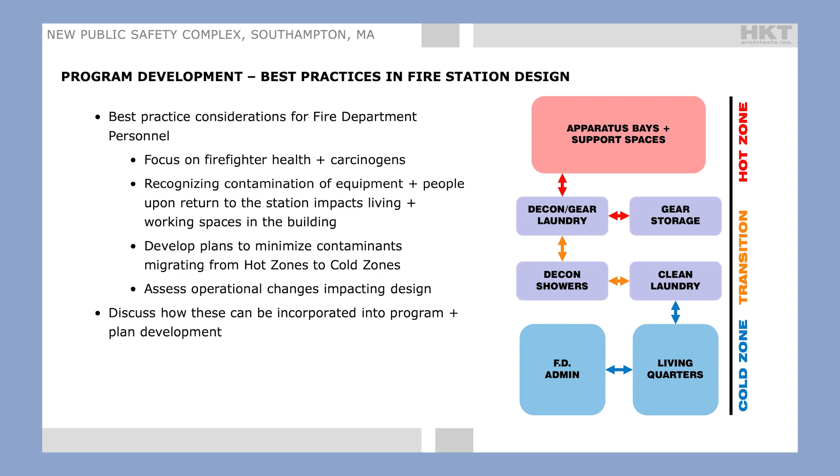And it's a process to figure out what your operations are and how that flow will work for your unique building. That's something we work with every department on trying to figure out, and I think it's something we've worked really hard to make work in this building as well.

One thing to note: the way every designer approaches programming is a little bit different. There are net square footages and there are gross square footages. Net square footage is the dimension of the space between the walls. So when you look at this room, for example, the distance from the face of that wall to the face of that wall, and from the face of that wall to the face of this wall, if we added that up and multiplied it out, that would be the net square footage. When you look at gross square footage, you're taking the depth of that wall, any circulation spaces, hallways, plumbing chases, and adding all of that in.

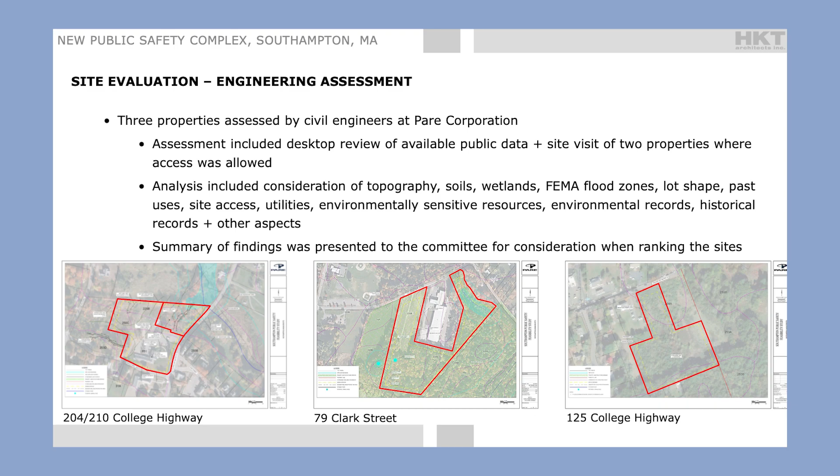We took that engineering analysis and presented it to the committee, and then used that information to rank the sites as part of this site matrix. The site matrix looked at 6 different categories: location, accessibility, site features, environmental, site development, and availability. Each of those categories had subcategories, and maximum points were assigned to each. We had a lengthy discussion with the committee where we went through each of those sites, each of those bullet points, and based on the engineering analysis and information we had, we assigned point values to that category for that particular site.

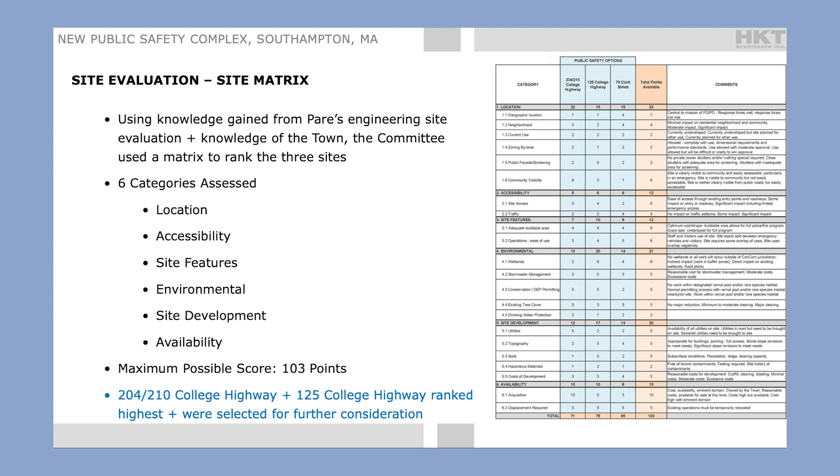At the end of it, we summed all of it, and the sites that ranked the highest, the 2 sites that ranked highest - 204-210 College Highway and 125 College Highway - were selected to continue on in the process and for further consideration as the final site for the public safety building.

At that point, we took those 2 sites and did some test fits. What that involves is basically taking the building program and blocking it off into large-scale components - for example, police operations or fire department living quarters, just big blocks of space - and start to organize them on the site how they might be organized in a building, put parking in, put other site features we know would be necessary, and see whether or not these sites were going to work.

When we started it, we had the engineers do another little quick analysis of the sites. You can see that here. So 204-210 College Highway is about an 8-acre parcel, and it's owned by the Town of Southampton.

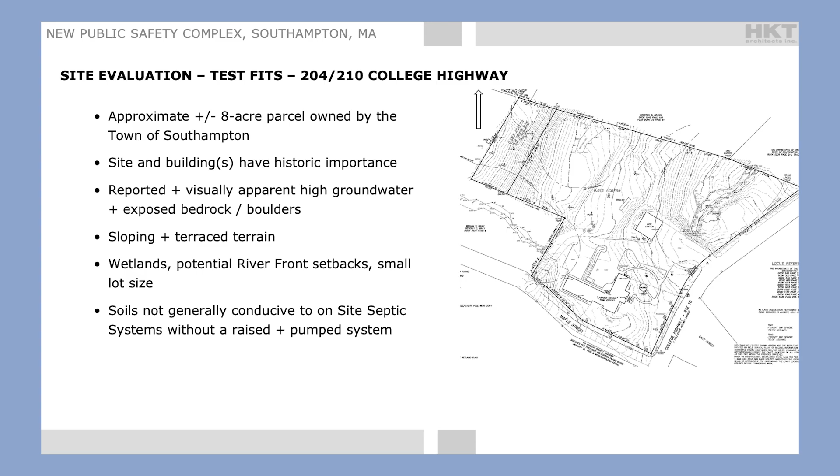It did have a lot of challenges, though, that we saw right off the bat. There's the issue of a historic structure, the existing fire station, and how that would be viewed through historic committees and the Mass Historic Organization. There was reported high groundwater issues, and exposed bedrock and boulders that were seen, which could create complications for site development. As you all know, there's really a very steep or considerable slope going up the site, so that places some complications for developing the site, for parking circulation, for where you place different things on the building. There are wetlands, there's a potential riverfront setback, and the soils themselves are not generally conducive to on-site septic systems without raising the grade or having a pumped system there. So a number of complications we saw right off the bat.

What you see here are some examples of the test fits that we do. So we did 2 different options. This is option 1 - ground floor and upper floor - and option 2, ground floor and upper floor here. We looked at them for the building layout and what we thought, how that would function, and then we asked our engineers to take a look at it and give us an idea of what they saw some of the complications would be as well.

In this one, it was recognized that for either option there was going to be extensive earthwork that was going to be needed.

We were probably going to need to do some extensive regrading, possibly some retaining walls between buildings to create tiers. We would probably have to reconstruct the town hall parking to make it work with that circulation. There was extensive permitting, as I said, because of the wetlands and the potential riverfront.

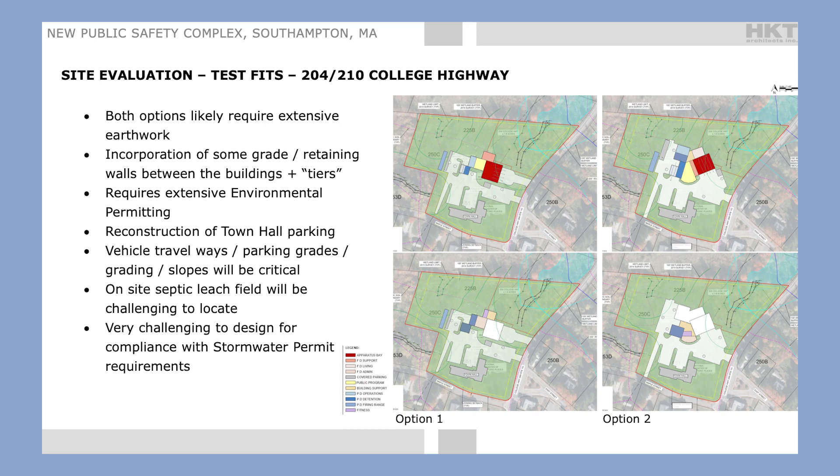We knew they were going to be challenged with the on-site septic, and because of all that, there were going to be challenges with stormwater design. So there were a lot of issues working with the existing site.

The second site we looked at was 125 College Highway, and when the committee asked us to first look at it, what we were really looking at was the 4-acre parcel right here that was potentially going to be donated to the town. One of the concerns that we saw right off the bat with that site was access out to College Highway

for emergency response vehicles. So we discussed, when we did the test fit options, doing 2 different versions: one where we put the public safety building just on this site, and a second option where we took over what was identified as a potential commercial property up here, so that public safety vehicles could exit onto College Highway through that parcel right there.

So we expanded the footprint a little bit to look at that. In general, the site was much more favorable to development. The soils seemed to be suitable for stormwater and for sewage disposal. It's a pretty flat site, so there were fewer grading issues than we saw on the existing fire station site.

There were no natural heritage issues. There was no riverfront setback or anything like that we saw on the existing fire station site.

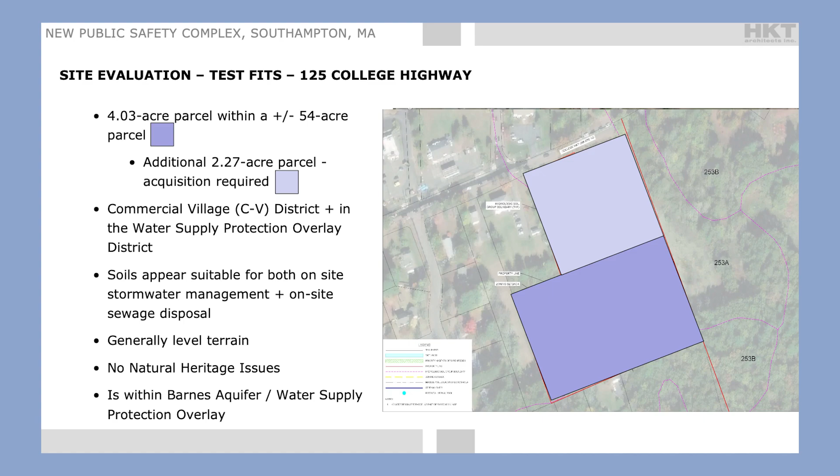So we proceeded with a couple of different test fit options. Option 1 here, again, was just on that donated parcel, and option 2 expanded so that we took over the commercial parcel here, so that public safety vehicles could access out onto College Highway rather than having to access out onto a road that has not been built yet, and that road would have had to go out and connect to College Highway.

When we had the engineers take a look at this, we all agreed that this was really a better site for a whole lot of reasons. The lot size supported all of the programming needs and really offered a lot of different opportunities for how the building could be laid out and how the site features could be laid out.

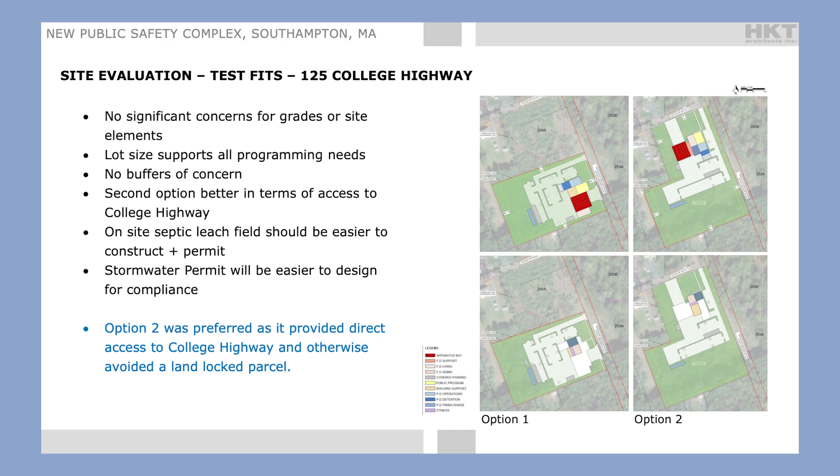We didn't anticipate any issues with septic or with stormwater permitting. There were no, as I said, any buffer issues for any endangered species or any wetlands or anything like that. So after presenting these options to the committee, they agreed that option number 2, where the vehicles had direct access out to College Highway, was really the preferred scheme to look at a little bit further.

So at this point, the project for the designers was put on hold while the committee did a little bit of work to figure out how they could potentially make this work, since this is not a town-owned parcel at this time.

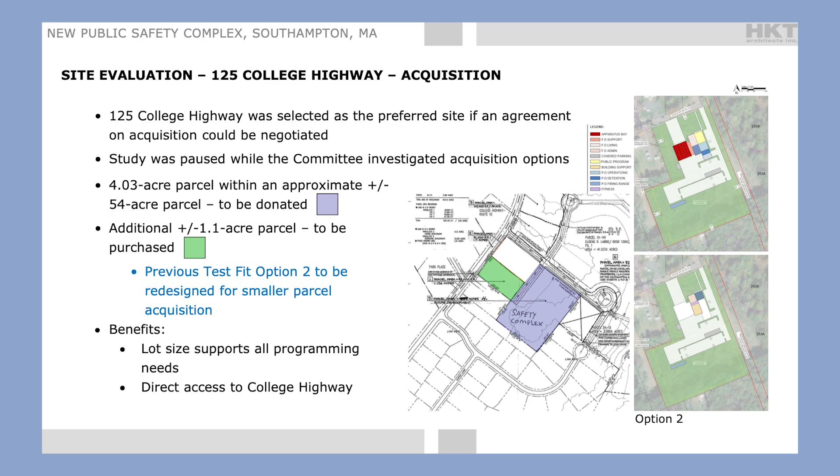So those were our marching orders to take the design to the next level. And again, we didn't see any issues with that lot size. We thought that would work fine, and so we took it to the next level, and we developed some floor plans on that site and some concept plans for the site to see how that would work.

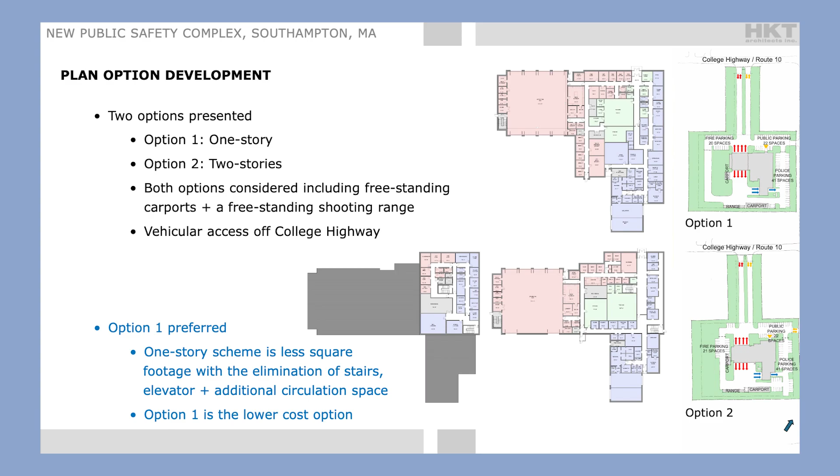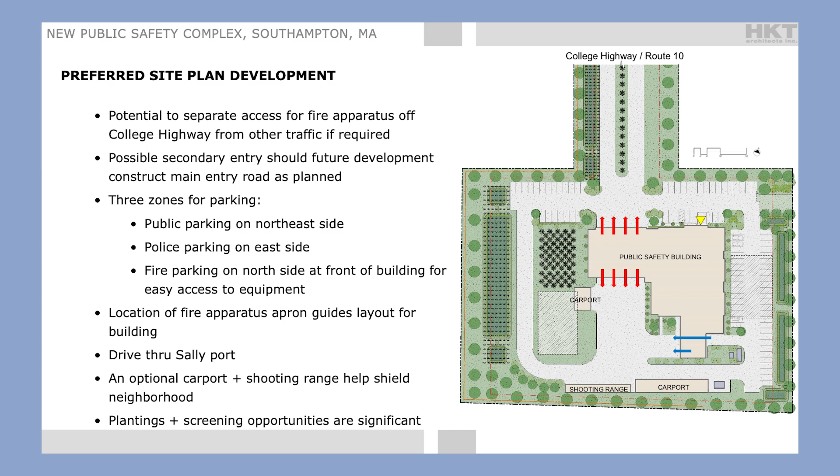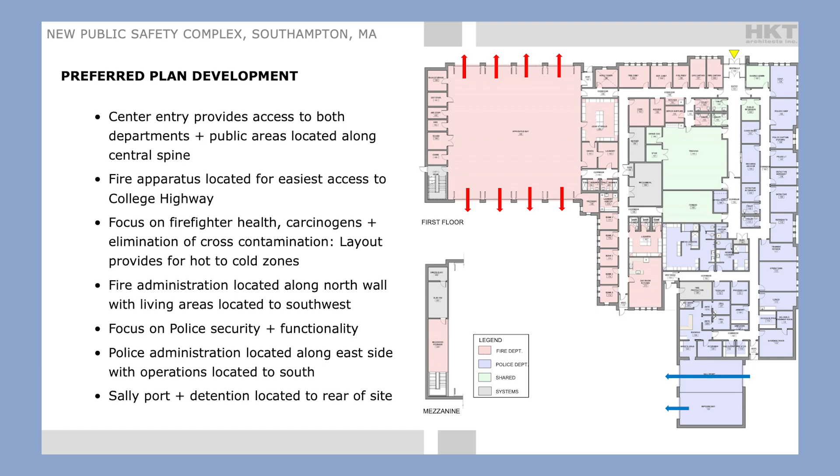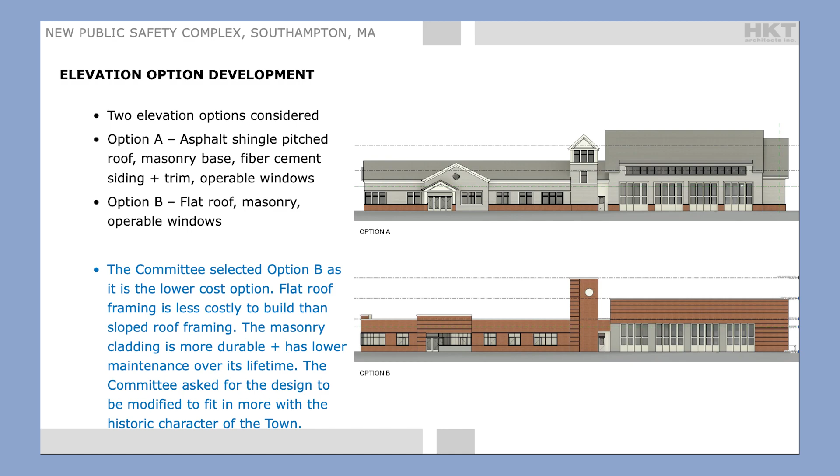The committee asked us, though, to redesign option B a little bit. They felt that it didn't necessarily fit in with the historic nature of the town of Southampton, and they were hoping to bring a little bit more of that historic feel into the design. So we went back to the drawing board, and we came up with what ended up being the final preferred elevation.

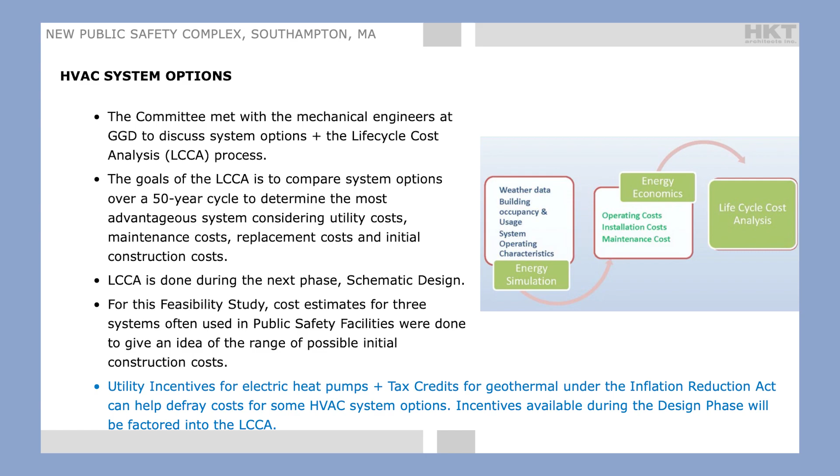There are substantial utility incentives for electric heat pumps and tax credits for geothermal systems, through the Inflation Reduction Act. Those can really help defray the cost. For the town we just worked with, when we did the life cycle cost analysis, even though a geothermal system had the highest upfront cost, over its life it was the least expensive system because of the rebates they'd get back shortly after construction was complete. When you get into the next phase of this project, the engineers will be looking at this and discussing with the town what makes the most sense.

The committee was also really interested in green design, so we put together a few different options for some green design elements for pricing, things that could be added into the project if the town decided to.

One of the most important things for people to understand is that we have a new energy code in Massachusetts that was promulgated in 2023, and that has had a substantial impact on the design of municipal buildings, and really any buildings in Massachusetts. We are seeing a big cost implication, and it's something to consider when comparing projects built 2023 moving forward versus projects built in the past.

There are certain things required by the new energy code. One is that 20% of parking spaces provided have to be electric vehicle charger ready. You have to have the infrastructure in the building in place, the circuits going out to the parking space. You don't have to put the actual charger in yet, but you have to have everything else there so that if the charger goes in in the future, it's plug and play.

Similarly, you have to do the same thing with photovoltaics for solar panels on the roof. The roof has to be designed to carry that structure, you have to have conduits going to the roof, and room for the equipment in the future. So you don't have to have the panels in right now, but you have to have all of that in place. And then we have to design a very high performance building envelope.

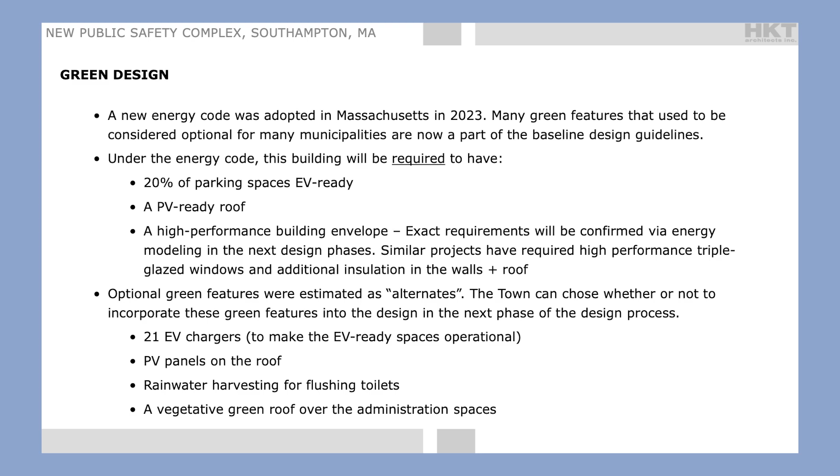Beyond that, we did price out some green features that could be added should the town decide to, and they could be added as alternates later. Now I will go over that pricing in a minute.

At this point, when we had that level of information on the design, it was time to give this information to our cost estimator to figure out what the probable cost would be.

The cost estimator works with hard construction costs, which are the costs you'd be charged by a general contractor coming in and building the building. The cost estimator uses the estimating package we give them, which includes limited drawings done to this point, the narratives about the HVAC system, descriptions of all the green options we were pricing, and all the code features I mentioned.

At this point the design isn't fully developed, so where information isn't available, the cost estimator makes assumptions, either based on what we tell him or what he knows about similar projects from working with us over time. They also carry a pricing contingency, generally 10% at this stage, to cover all the unknowns that might come up later.

Hard construction costs are just one piece of the total project costs for a building. There are also soft costs, which include things like furniture, fixtures, and equipment, plus fees and expenses like architecture and engineering fees, commissioning fees, legal fees, printing costs, and all kinds of other things.

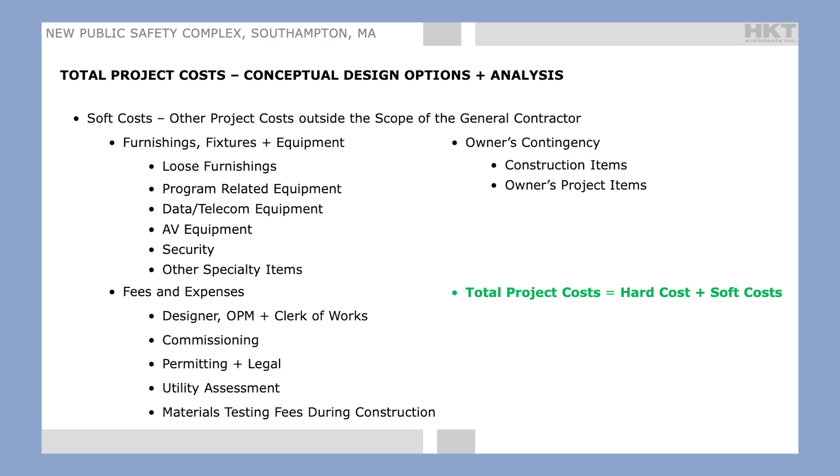So the total project cost is the sum of the hard costs and the soft costs. As you get further into a design you can really define those soft costs, but at the early phases we know they tend to be about 25% of the hard construction costs, so we just carry a percentage early on.

This spreadsheet summarizes the hard and soft construction costs. Over here you see different items: the building and site cost in this line, and we separated out the cost of the carport for the fire department, the carport for the police department, and an allowance for the shooting range. The sum of all those together is the subtotal of the hard construction costs.

This column shows the estimate when we first presented to the building committee. When we presented it, they immediately recognized some cost-saving choices they could make, including putting the carports and the shooting range on hold. Highlighted here in red is where we stand right now with the project.

The hard construction estimate puts the project at about $27.4 million, and the soft costs are about 25% of that, or $6.8 million. We'd recommend carrying an owner's contingency of 10%, so the subtotal of the soft costs is $9.6 million. The total project cost, the sum of the hard and soft construction costs, is about $37 million.

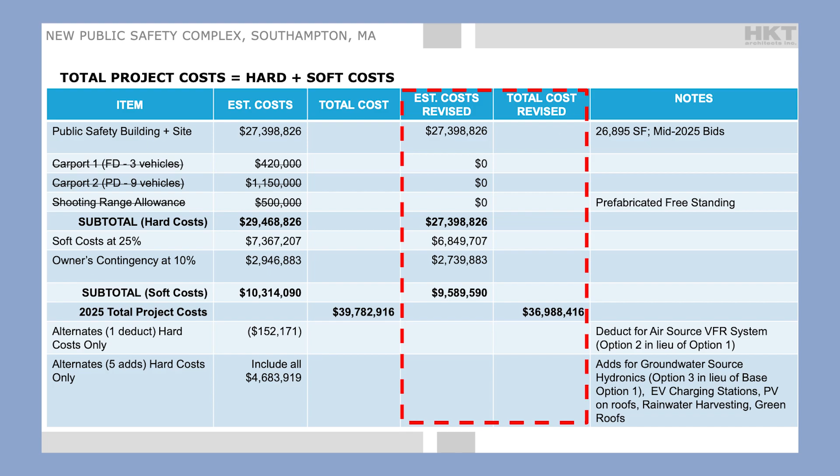These are the prices for the different green design alternates that we had the cost estimator estimate. The first two are HVAC options the engineers presented. The first option was included in the base cost. For one option there's what's known as a deduct, a savings to the project of $152,000. Whereas doing a geothermal system would add about $2.4 million to the project. These are some other green options we gave the committee to consider.

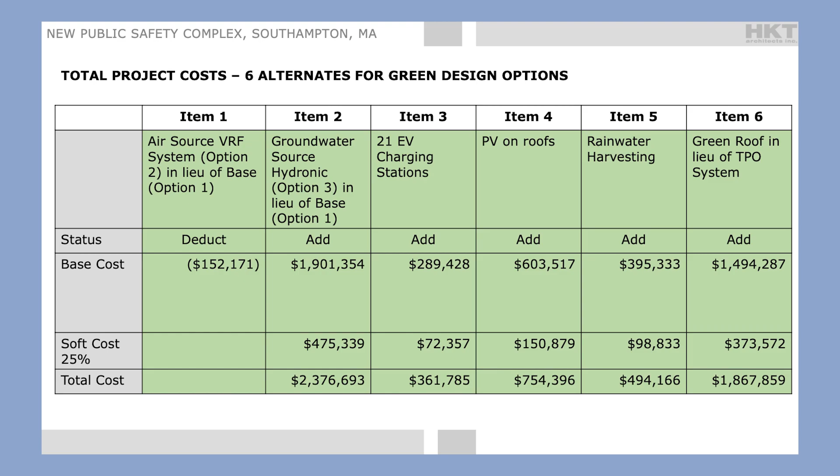In the base design we have to have parking spaces that are EV ready and a roof that's PV ready, but actually putting the charging stations in now or the solar panels in now, we gave them costs for that. We also gave them a cost for rainwater harvesting, or collecting stormwater so you can use it for flushing toilets or watering plants — about $500,000 — or putting in a green roof, a vegetative, plant-based roof system rather than a membrane roof, which would be another $1.9 million. Those, again, are just options; nothing has to be incorporated into the building.

So, one thing we wanted to talk to you about is construction cost escalation, because there are frequently comparisons made between projects that happened in years past versus what's going on now. In addition to changes in the energy code, it's really important to understand construction cost escalation. Prices are always going up, and for a long time in our industry we looked at escalation from year to year—we would assume costs would go up about 3.8 to 4% a year.

But then the pandemic hit, and as you all know, costs went haywire, like going to the supermarket and everything. There was also a real impact on the construction industry. When the pandemic first hit, beginning in 2020, there were supply chain issues, worker shortages, and companies closed, both suppliers and contractors. All of that had an impact on costs, as there was just less availability of everything.

And since 2020, inflation continues to grow. During that period, from 2020 until what's still going on now, we've seen costs fluctuating all over the place, with escalation ranging from 8% to up to 15% per year. It hasn't really leveled off just yet.

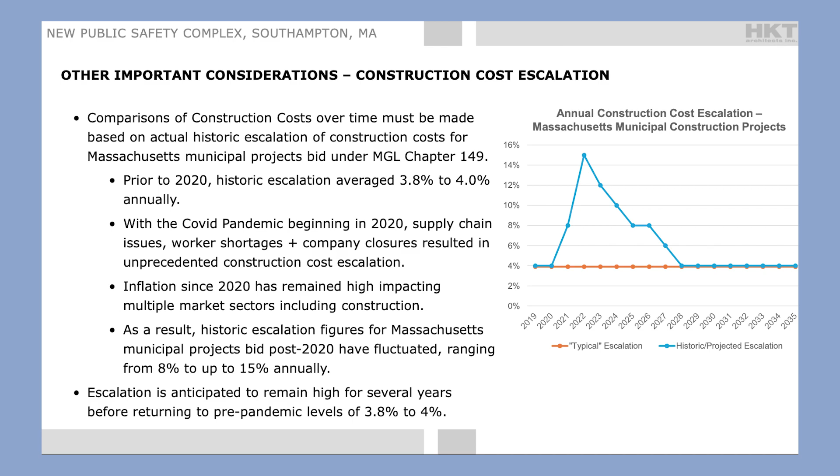We are certainly hoping that it will, and I'm going to show you on the next slide what might happen in the future. As we're looking to the future and talking to our cost estimator, we're hoping right now we're seeing escalation between 7 and 10% a year. We're hoping it starts to level off in the next couple of years, maybe down to 6%, and then beyond that back to 4%, but we're not seeing that yet. So that is having a huge impact on where costs will go in the future.

If that project had been built in 2019, and we de-escalated that back on the real escalation percentages we've seen since then, that same project in 2019 would have cost about $20.1 million. So you see just in those 6 years, we've gone from $20 million to $37 million.

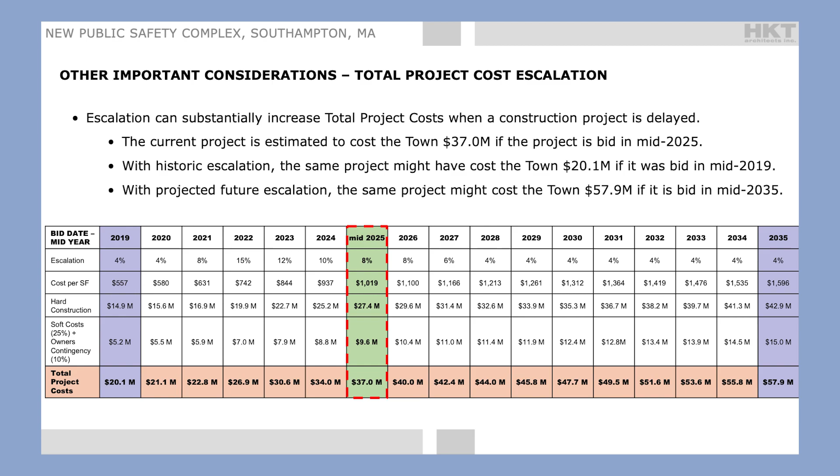So that's what I have to present, Christina.